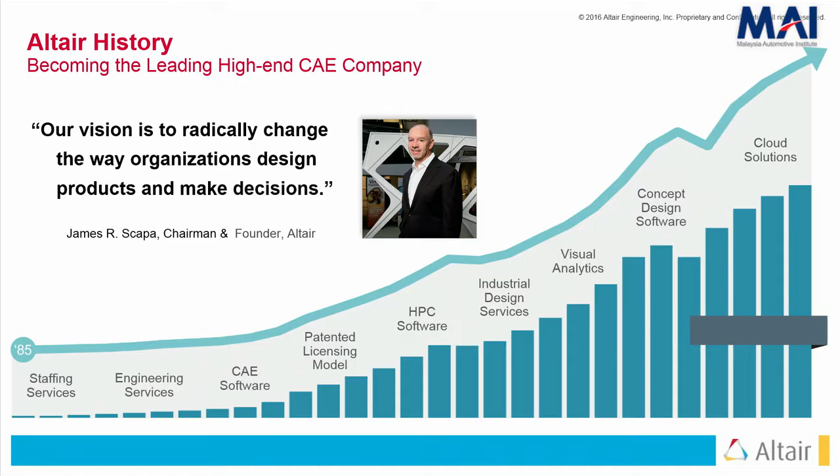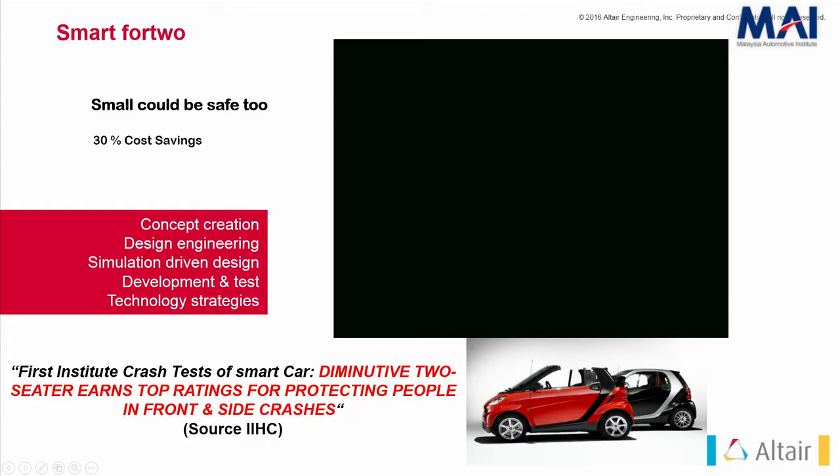So we started off developing what is called HyperMesh, which would read in the data from any of the CAD platforms like CATIA or I-DEAS, NX, Pro/ENGINEER, and so on. It can read the native file formats and then write out the files for any of the CAE solvers like ANSYS or Abaqus or Nastran.

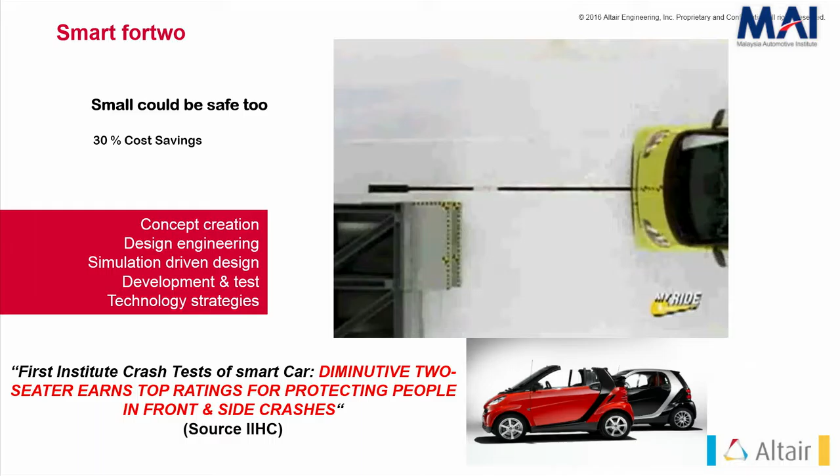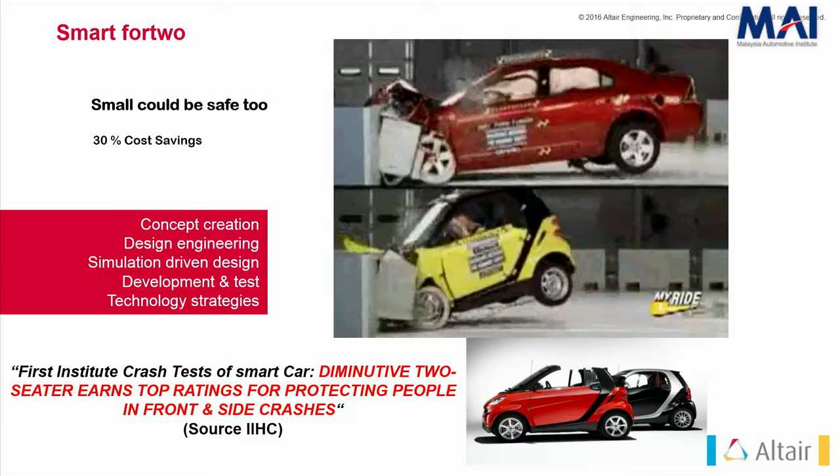And then we continued to add more and more tools to our portfolio, either by organic growth or by inorganic growth. And today we have a number of tools and services that we provide. Though we diversified, we've retained a strong legacy of services. We have over 700 engineers, designers, scientists, and creative thinkers spread across the globe who help our customers in their product design and development.

Okay, our contribution for this vehicle, Smart ForTwo, is concept creation, design engineering, simulation-driven design, development and testing, and also to provide the technology strategies. And the good part is, we could save 30% of the development cost, through our association, through our technologies and our domain expertise.

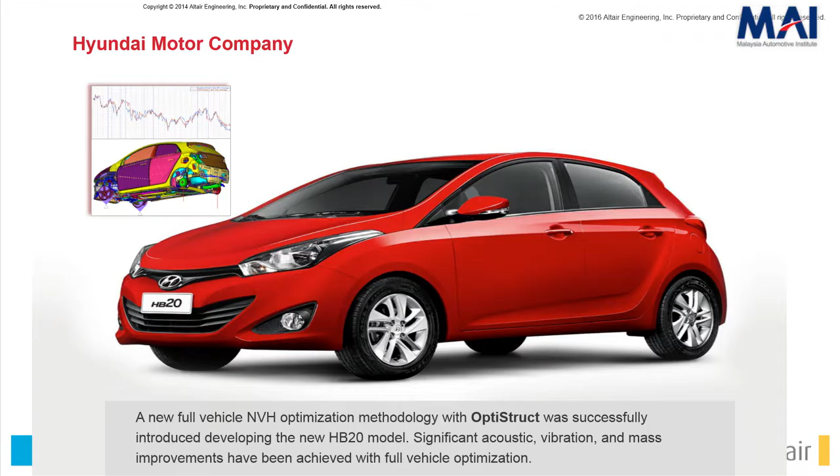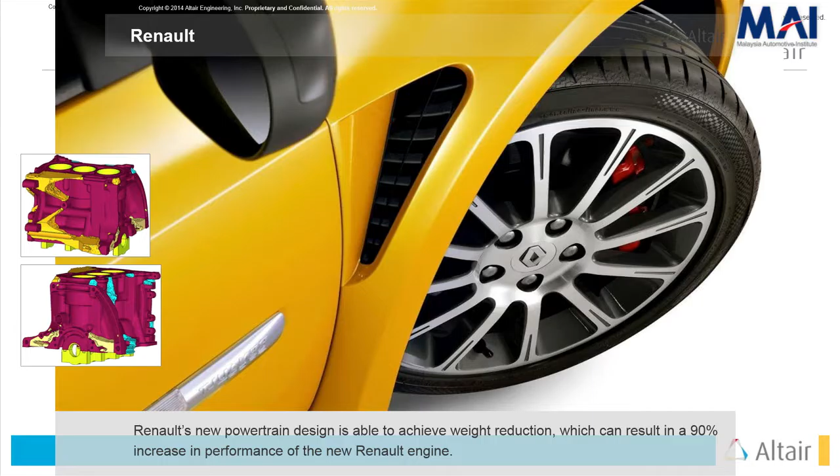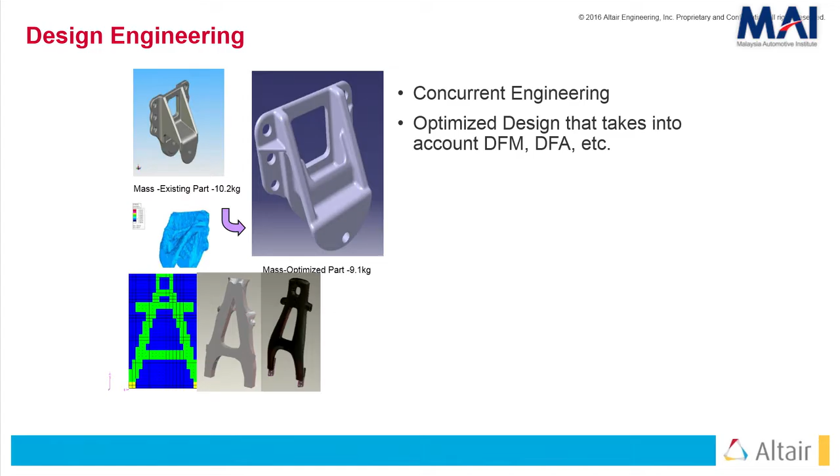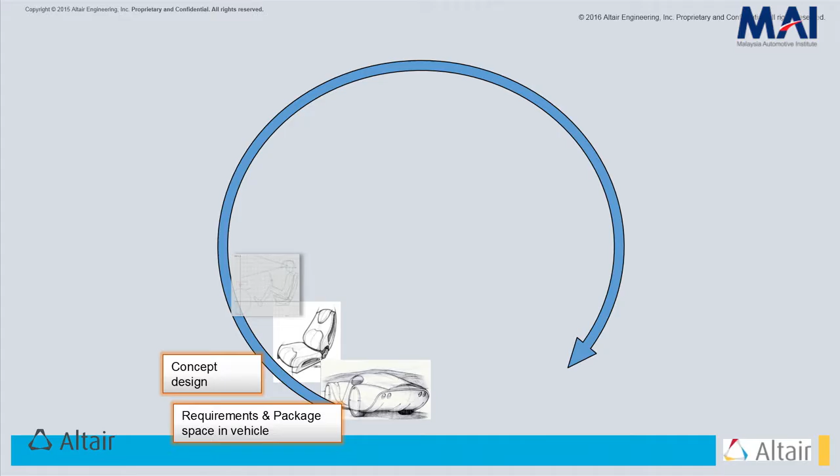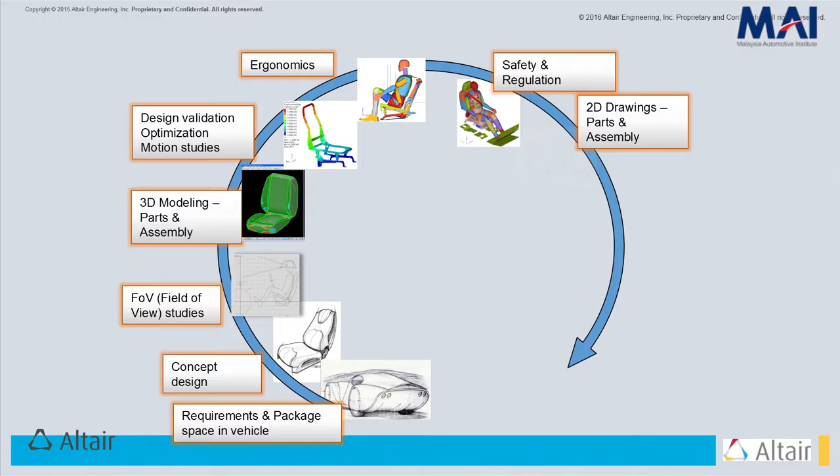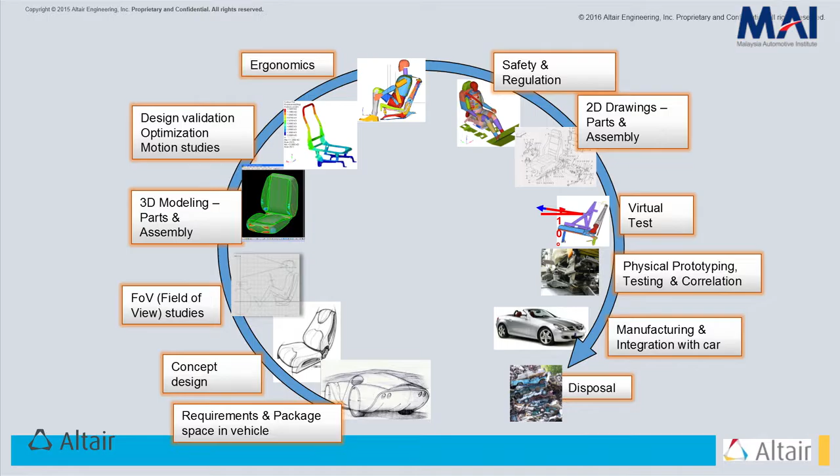I just want to show you a simple example of the whole life cycle, how the whole process works around a product. So the example out here is a car seat. So it starts off with the requirements and the packaging space that is available in the vehicle.

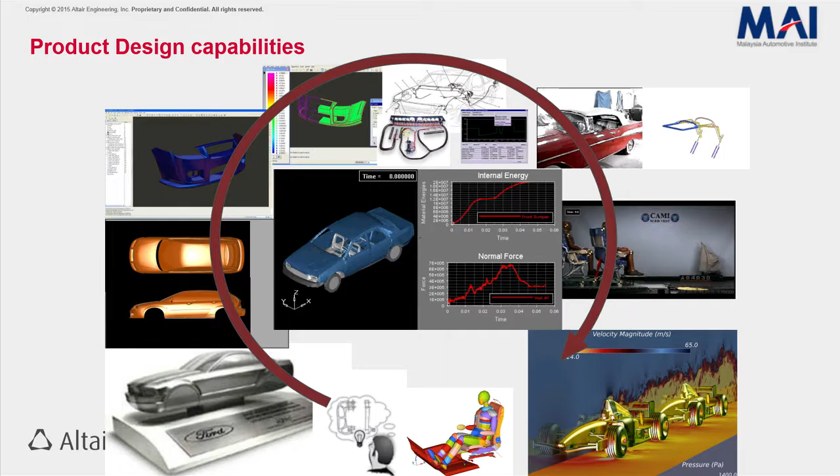And from there, the OEM starts giving the spaces to the seat developer. The concept design is made. And then you do a number of other studies like the field of view studies to figure out how ergonomic your seat is. And then you do 3D modeling, part assembly, and then do the design validation.

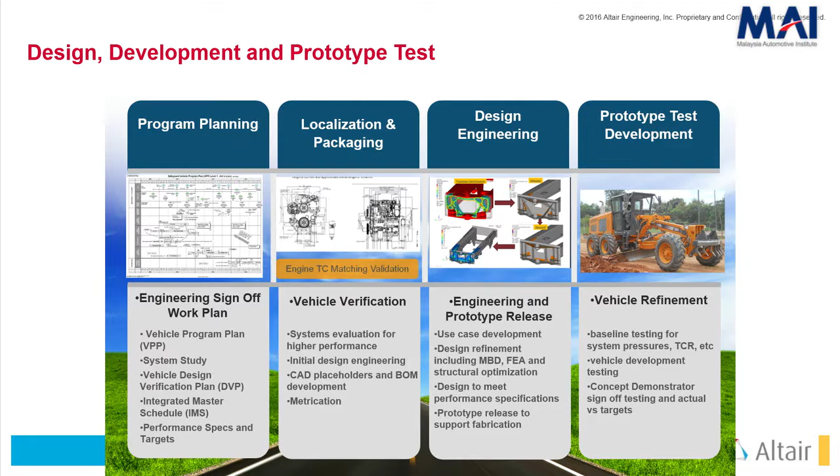There are different types of validation that you do. Start with simple linear static, all the way up to crash simulation. And you do optimization studies, ergonomics, safety and regulation, and then you come down to virtual testing, physical prototyping, and then you do the correlation between the physical prototype test and the virtual simulation or virtual test that you have conducted using the software. And then you finally put it on the road, and at the end of the life, you dispose of it.

So obviously there are other things which the OEM doesn't do. They normally outsource the manufacturing of jigs and fixtures, design and simulation of those as well. So this is just to give you an idea of a product. If you take any product, how complex it is, and it's not like a couple of days, a few people work on it and you get it right. It takes a lot of work. There are a lot of phases that it goes through, and a lot of people have to put their heads together to come up with a product that works perfectly. And none of us want a vehicle that breaks on the road.

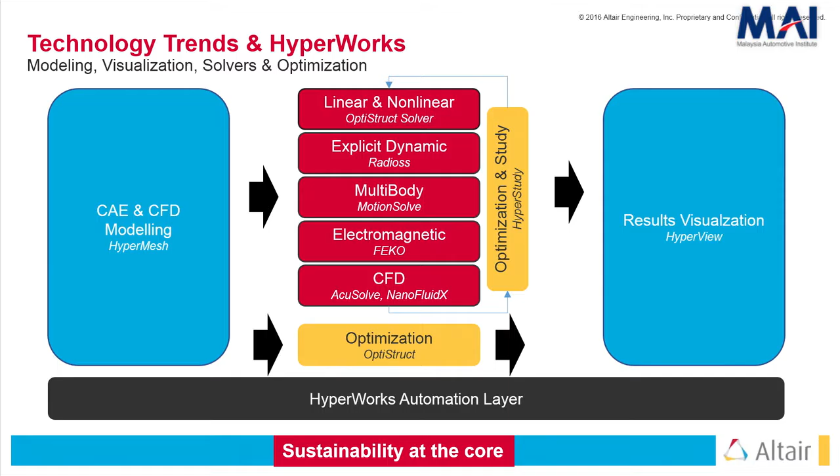So what is it in this whole thing that we contribute? We obviously contribute from ideation all the way until the vehicle physical testing is done and approved by the competent authorities. So this is just to explain, from the aggregate level I showed you, starting from ideation all the way till the end. Similarly, for full vehicle programs, we participate either somewhere in between or in the whole process, starting from ideation all the way to the physical prototyping and homologation. So that's where our strength lies.

So just to give you a snapshot of different areas that we participate in. In general, we participate with different companies in the program planning, localization and packaging, design engineering, prototype development, prototype testing. And not only that, with the newer demands that we have today with IoT and autonomous vehicles coming into the picture, we take up a lot of design research, design engineering, simulation-driven design, and development of newer technologies which can be adopted into the current scenario. So that's about the services. We provide end-to-end services.